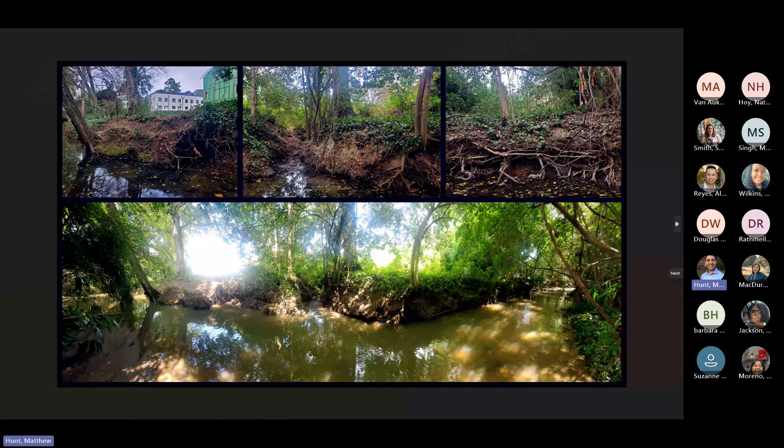If we continue to lose the land, we continue to lose the chance to recover that buffer. So this is a nice little review of where I started, back in 2024.

So, 2024, 2025, and then 2026, just this morning. All of these faint blue lines show there is no soil.

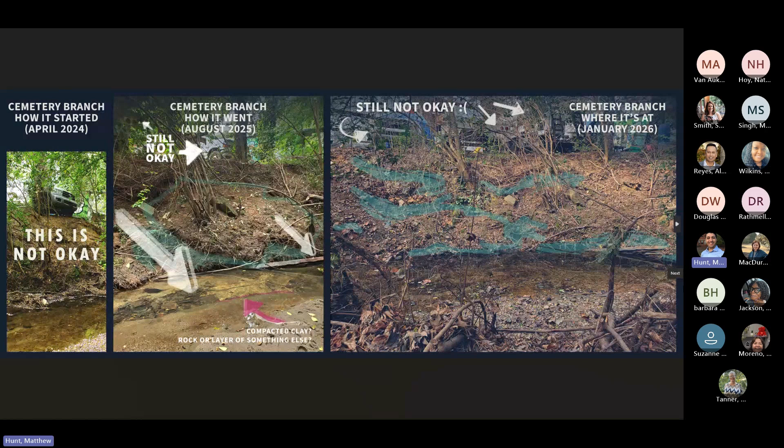It's just gap. Everything continues to erode in really confusing, dramatic ways, and it slumps that upslope neighbor's property into the creek. Next slide.

This is a confusing situation, so I'm going to hand out this paper set. This is the top-down view as though we were looking at it from a map, and this is what it would look like in 3D perspective.

It's easier to match it up and see, oh, that's impervious surface, that's supposed to be the sewer line and riparian buffer, but that buffer is actually deteriorating.

If development is taking the entire lot up to where the surveyor points are, then they're using whatever area this is assumed to be and factoring that into their impervious surface limits.

But what's happening, this whole green section is of varying quality. If we don't have eyes on that and don't maintain it, then this is realistically not as large as it suggests. And if surveyors put flags on posts that don't have land underneath them...

...or may not have land in coming years, then that actually changes the impervious surface to pervious surface ratio.

I'm concerned about whether we should be addressing impervious surface limits using unbuildable land within that ratio. I don't know what it's currently like, but I want to revisit and encourage consideration to look into making adjustments.

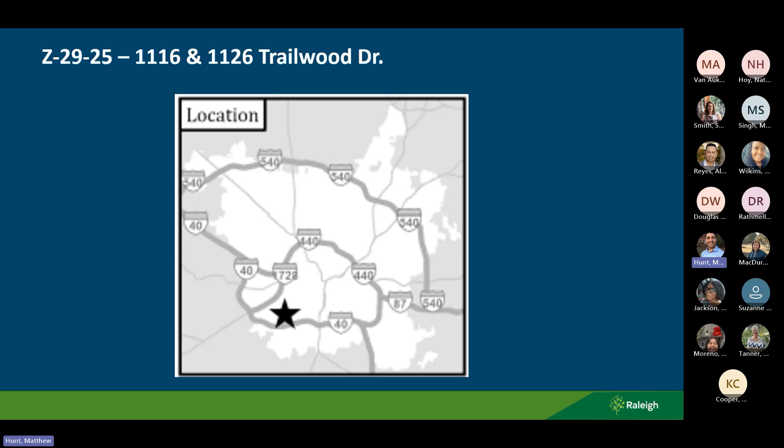So the first one is a new one on the planning commission's agenda that's coming up Tuesday the 13th. It's off Trailwood Drive, which is in Southwest Raleigh. Essentially, it's two lots that are acting as one residential lot, and they're looking to go from R4.

Sorry, R4 with the special residential parking overlay district on it. I think it's some neighborhood thing that they have. And it's going to an R10 conditional use with that same overlay district on it. Sorry, I added in my notes what that stands for because I've never seen that sort of overlay district before.

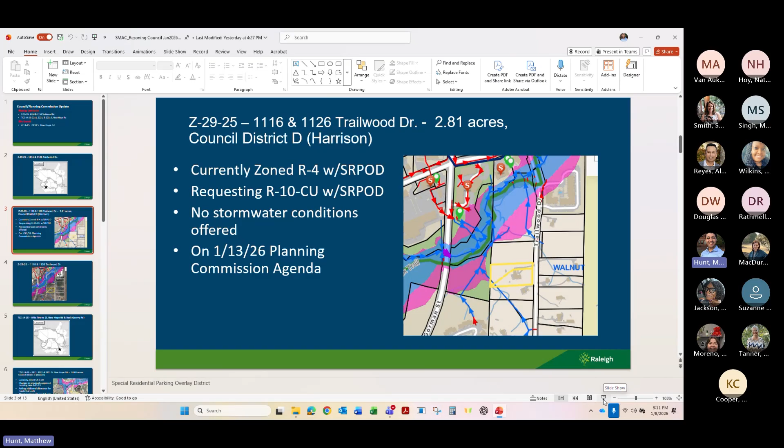But if long-time SMAC members will remember, the property to the north here had a rezoning a few years ago to do apartments in this area. They were going to stay out of the floodplain, but this is a very high part, this is real low and it went down very steeply. That is still not commenced, so they still haven't built that yet.

And it looks like the adjacent neighbor is having someone rezone their property as well now. I'm not sure the exact plans for it moving forward. I'm sure once it moves through the planning commission and city council, we'll know more about it. But right now there's no stormwater conditions.

So did the one to the north go to R10 as well? Yes, it went to something similar to R10. Yeah, something like that. And it should be noted that all these properties on Trailwood, which is kind of near NC State's campus, near Gorman Street and Neighbors area, these are all in the ETJ but not in the city limits.

So they're a little bit funky. A lot of the neighbors living out here feel like they live in the country, even though they can throw a rock to get to city problems. It's fairly rural looking development out here too, I'd say. But right now there's no stormwater conditions. The first time it'll be heard via planning commission is Tuesday, so after that we should have more information.

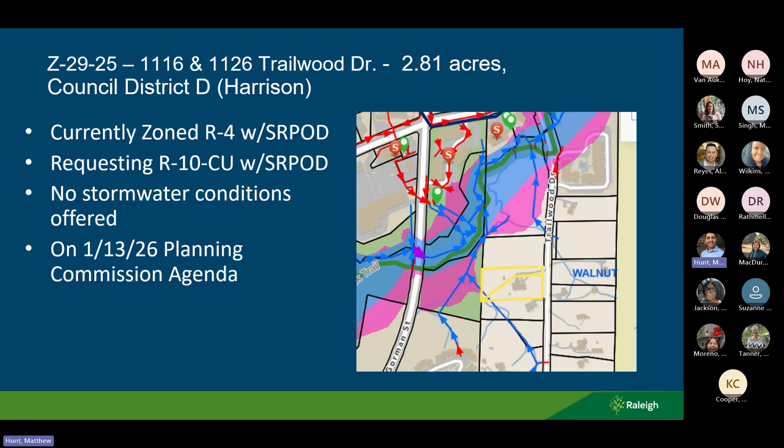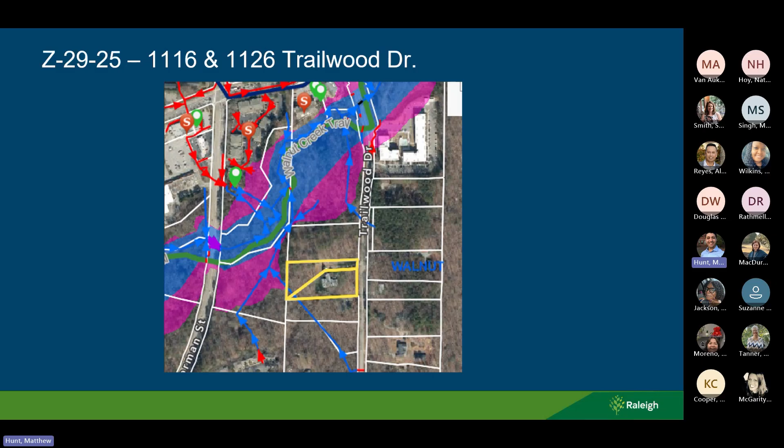All right, next one is back to the South New Hope area, in Olde Towne. This is a property to the east of South New Hope Road, which is not the one that we got the presentation from the applicant on, but this was kind of separate from that, just adjacent to it, so that's why I wanted to keep this on our radar as the other one is going through the process as well.

So this is mainly still going to be a commercial park, but they're adding some flexibility to allow for residential units out here, but this is still going to be the commercial hub for kind of Olde Towne. It's not really a floodplain, it's kind of on top of the hill. This is a watershed boundary line, so it's sitting on top of two different watersheds. But just kind of keeping this in our minds, since we know what's going on next door, there's no stormwater conditions on this one, which doesn't really surprise me.

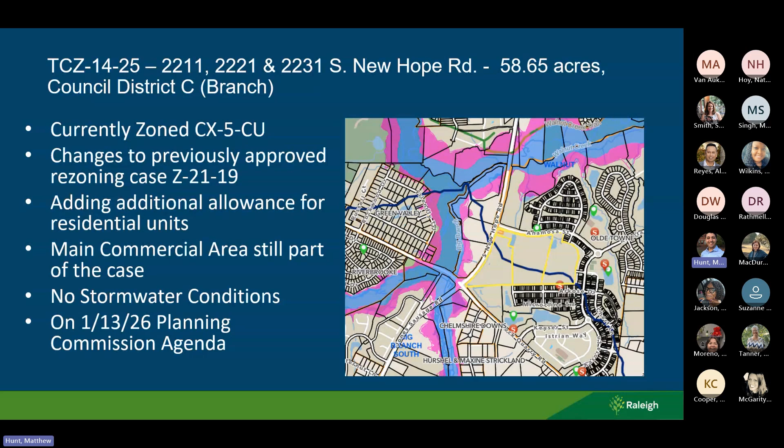And it's on the planning commission agenda for Tuesday as well. Was the case adjacent to it approved? Yeah, all right. Was that the next slide? Well, this is the aerial, this one is right. Yeah, so this is what they're saying now, just the way that it's kind of developed to go.

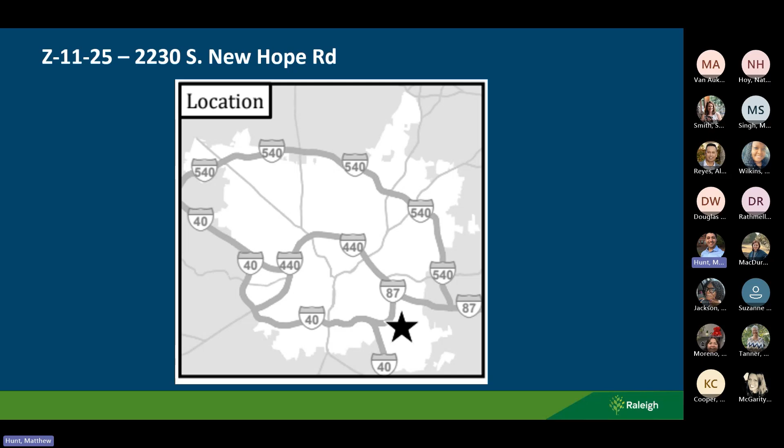And then our last real update is South New Hope Road, same area. And it's across the street, this little C-shaped lot, as Lanny called it on Tuesday night, which I really like. And this is the one where we had the presentation for. They've got conditions that was here as far as staying out of floodplain. They did add, going into the public hearing on last Tuesday night at council,

controlling the rate of runoff leaving their site to 50-year storm pre-development levels. So that was an additional condition that they added beyond just the floodplain conditions that we're talking about with this group. As you recall, the planning commission actually voted on this case before it came for you all. They actually voted in denial, but then it came to SMAC, and they've added conditions for floodplain, and then they met with PEJ, and they added conditions for stormwater rate control at this point.

They went to public hearing at the beginning of December, and also got continued to last Tuesday's public hearing, and they got continued until January 20th at the next city council meeting, because they're going to get some more conditions as it relates to affordable housing.

But they are still in discussion with PEJ. There was time added to this case for both sides, since City didn't get to talk this past Tuesday because they used up all their time from the previous public hearing continuation. So both sides got more time added, and both will be able to talk at the January 20th hearing.

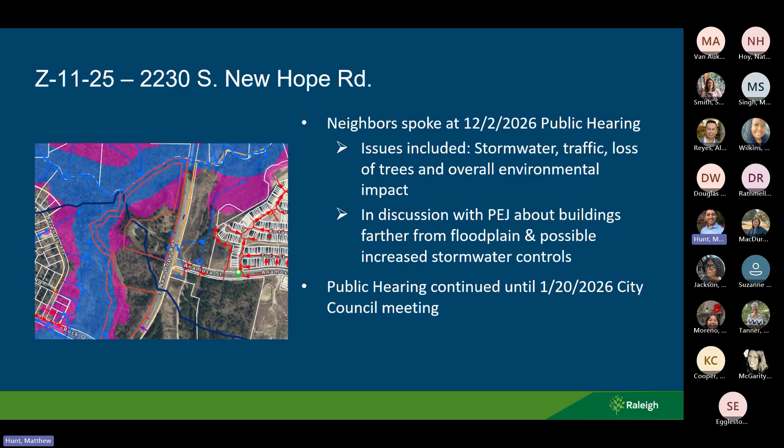And then they added the rate control condition between the December 2nd public hearing and the January 6th public hearing, and they've committed to enhanced stormwater or sediment erosion control, plus additional stormwater management—pre-post comparison. They brought it up to the 50-year storm for post-construction stormwater, and the 25-year storm for during-construction sediment, whereas the requirement by ordinance would be 10 and 10 for during-construction sediment erosion control.

When we say no building, is that like when people are developing homes at smaller scale but have a protected tree area they don't go anywhere near? Is that the same thing, or will they just not have a final building on that area but still be able to disturb it? Yeah, they haven't committed to that—they've committed to no parking lot or parking in that area, no buildings, but they're not committed to not regrading the area they're allowed to grade in without any sort of variance. I can't guarantee they're not going to disturb the trees in there.

I'm not sure the exact tree conservation rules for this area, because tree conservation rules are around major roadways and streams, so they'll have a stream in the back and a certain amount of tree conservation area there. They're not actually committed to keeping all the trees in the floodplain, but they're not going to develop on that northern part of the site—that'll be the TCA. And they're committed to no impervious surface in the floodplain—no parking area, no building, basically keeping people out. I believe they said they're cutting their site area by approximately half with these conditions.

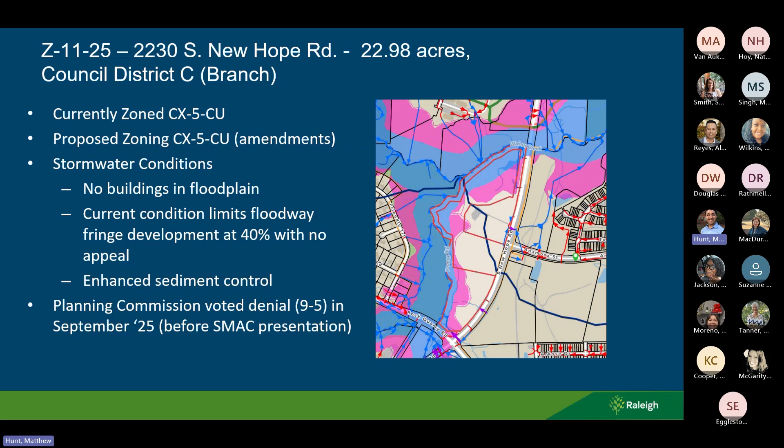Extra information first. I'm gonna try to set the expectations. I'm not looking for comment on this, but it's an interesting enough case that Mr. Croft and I have talked about it. It's something I feel like we should just at least hit on.

Essentially larger developments that are next to highways, which the Beltline classifies as a highway, have a certain vegetative buffer around them. As you can see, this is from 2020 and this is from 2025.

So obviously anyone that's been around West Raleigh in the past 5 years knows NCDOT's been working on the belt line in that area for quite some time, and they're pretty close to wrapping it up. This red line is the Kmart lot line essentially as it stands today, though we don't have records on the areas of the old property lines.

Essentially they're coming in to rezone this area because they're doing some limited commercial redevelopment here now in the existing footprint, and they're looking for rezoning to be able to build more dense development here.

But at odds is the SHOD yard not being there, because as you can see, it appears the Kmart property used to go out farther and the belt line wasn't near close to it. When the belt line expanded and they took out the vegetative buffer, they probably put it in Kmart property, because you can see their parking lot from there. So now there's no vegetative buffer there.

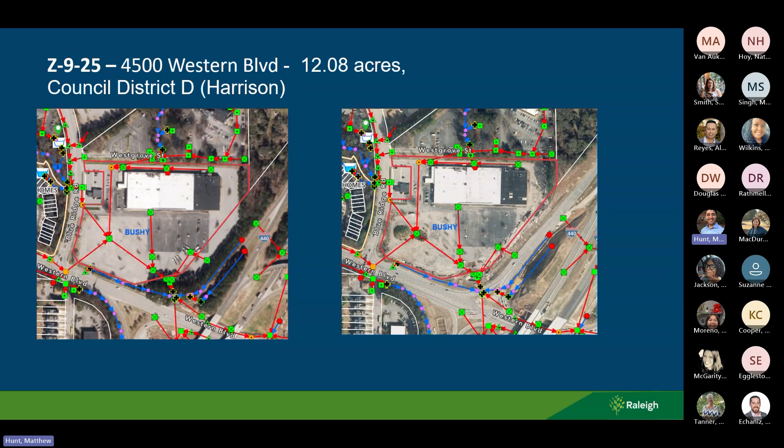I would request, in the Trailwood example, which is going to be a few of them going, I am going to meet with the team next week. I'd love to have some communications, but I can share that with you. I hate waiting until after the event to go back - I'd like to be able to go in and hear the concerns before we get to the public hearing. So I will reach out to you once I have that meeting, or maybe I'll meet with you. Okay, thank you. All right, so that was on our site.

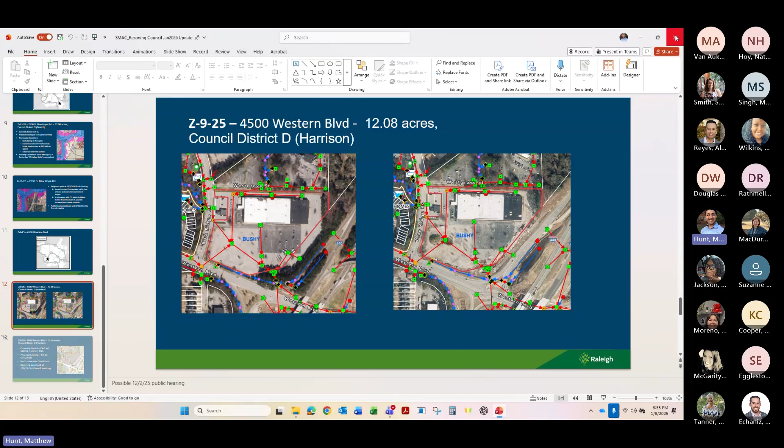Board plan is attached, as always, and referenced in the agenda items. We do have a stormwater staff update. I'd like to introduce Allison Acosta, who has joined the stormwater plan review team this week. She's coming to us from the city of Charleston, South Carolina, where she spent time as a civil engineer, reviewing plans for stormwater compliance, which is what we're asking her to do. She brings excellent experience, with additional years of experience in private consulting, drafting and designing civil plans with a concentration on stormwater management. She graduated from Clemson University in 2017, and she's a professional engineer. Please welcome Allison to our team.

High priority topics: we're still working on implementing the new e-scribe system. In the emails you received with the agenda package, there is now a publicly accessible link if you would like to access the agenda through e-scribe. We will, for the time being, still have the PDF attachment for your convenience, but over time please try the e-scribe. We'd like to ultimately convert and use the e-scribe agenda method.

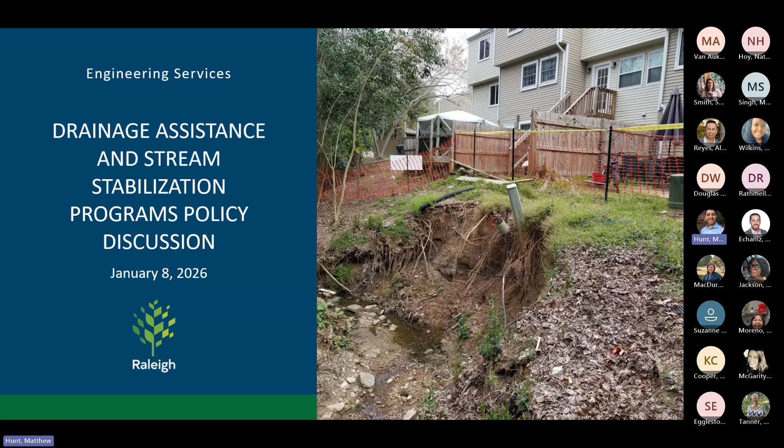So we're still here to receive some suggestions, but probably wait to vote at the next meeting. Is that correct? Yes, that is correct. I understand there's a lot of new language, we'll go through that so we can understand. Great, give you guys an opportunity. Great to see you guys again.

Our mission statement for stormwater is to protect life, support health, and natural resources for sustainable growth. Our vision statement is for our stormwater program. We have different groups we work with, highlighted here, including infrastructure and assistance down in yellow. We work with all our various groups and capacities together to be stormwater smart.

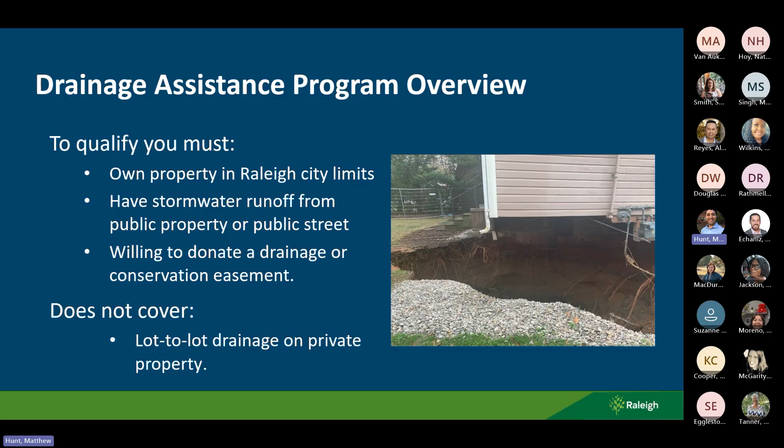So just a little program overview. This has been a couple of months as to what qualifies for drainage assistance and stream stabilization. You have to own property within city limits, have stormwater runoff from public property or public street that is some sort of public contribution, and be willing to donate a drainage easement or conservation easement. We do not cover lot-to-lot drainage or private drainage.

So just to give you a timeline, back in 1989 City Council created a city cost share program for stormwater, understanding that a lot of these repairs—and you've seen the cost of repairs can be quite high—so there was a cost share, as these are all on private property, for the private property owners to maintain.

It was eventually realized that even if you had, say, a $100,000 project—which, as you know, right now it's a smaller project—the homeowners could put in $20,000, which was 20%, the cost share at the time. That's still a lot of money for them, so it became a fully funded city program in 2016.

Then in 2022, five policies were brought before the commission and council, and we also created the stream stabilization program with the creation of the stream stabilization policy. Now, about four years later, we're coming back with policy revisions, just to show how this program has evolved and where it's come to.

So again, just a refresher as to why we're proposing these changes: to align with the unified development ordinance and new stormwater design manual, and to limit projects that have structures built in the Neuse River Buffer prior to the buffer rules going into effect.

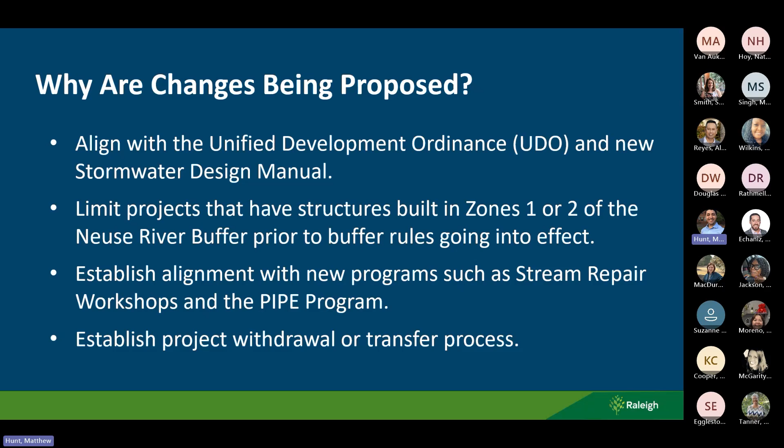We're establishing alignment with new programs such as stream repair workshops and the PIPE program—this slide is just a little refresher on what the PIPE program is. And then we're going to really hone in on the project withdrawal and transfer process, which was a lot of your feedback that we appreciated from the last commission meeting. So, PIPE—and I really like this acronym—stands for Pipe Inspection and Public Engagement Program.

We try to be more proactive. As you know, a lot of what we do within stormwater drainage systems is reactive, so working with our partners in asset management to help lead this program allows us to become more proactive. We appreciate that, along with working with the homeowners and communicating with them as well.

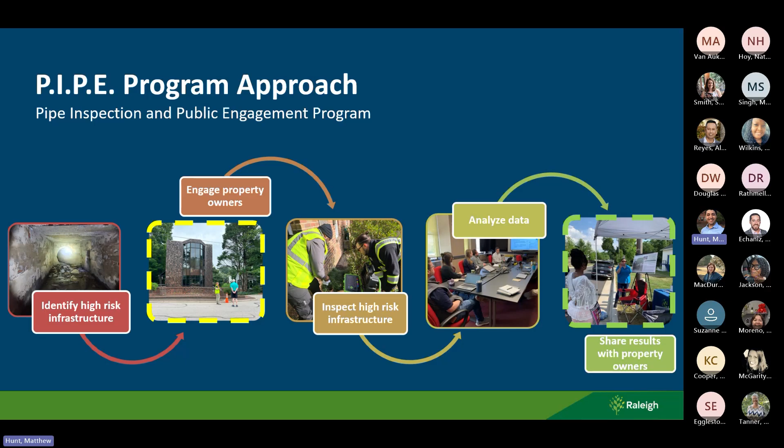So the feedback you gave, which we really appreciate, led to good discussion. You asked us to identify holdups for approved projects, to provide solutions for those project holdups—which you'll see reflected in some of the text we're proposing today—and you asked that funds approved but unspent on approved projects cannot be kept if the property withdraws.

The only concern is if we spend this money and the property withdraws—how can we try to deter property owners from withdrawing from the program? Because that is money the city could otherwise have.

Since 2016, when the program became fully funded by the city, SMAC has approved 75 projects. 4 of those projects have been withdrawn by the property owner. 1 more project was withdrawn due to an HOA being defunct. 1 more project is on hold because of easement concerns. And 2 more projects are on hold because the properties are listed for sale.

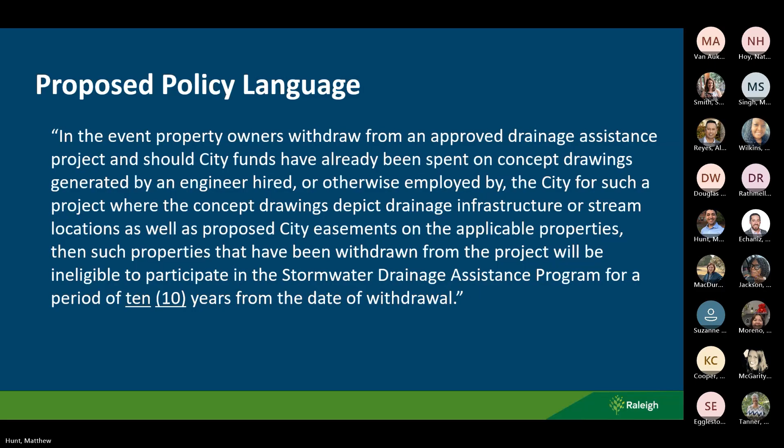So the second scenario would be, what if someone sells the house - that's one of the scenarios I mentioned. So they sell the house, and you have a new homeowner living there. In that case, we make sure to provide a copy of the work we have done, the concept drawings, sharing it with the new homeowner. We initially thought to give them 30 days, but it was suggested we give 60 days, which is more reasonable.

So the homeowner has enough time to become familiar with the issues and the plan we are proposing, so they're not rushed. It's up to the new homeowner - they can say, no, I don't want to participate, and that's completely fine, we are not going to penalize them for that. They can still come back, but they have to go through the same process again: submit the application form, which we will score and evaluate.

If there are other properties involved in the drainage project, the provision elsewhere about withdrawal applies. So despite all that, the new owners of the withdrawn property will have the possibility to apply, and they will not get a period of ineligibility, so they are eligible.

Great, thank you. Good, yeah, good feedback from the last meeting too. Thanks for that. Thank you. Speak to it.

Let's see, looks like we're moving right along. Let's go. Oh, is that happening? We're getting ready for you though, ready for your motion to adjourn. Yeah, we're holding that for you. All right, here we go.

Sally's going to educate us on requirements for development and redevelopment, post-construction world. Good afternoon. Ben will be joining me, but he's decided to wait until we get to his portion.

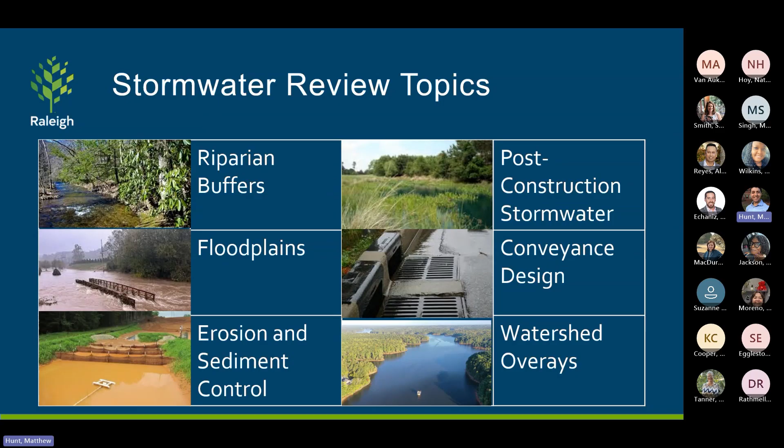All right, well, I'll be talking about an overview of our development regulations and then focusing on the full stormwater and exempt property requirements, as well as the ongoing requirements after construction. So there's 6 areas our plan review team works on today. We will be talking about post-construction stormwater, not the other 5 areas, but I will note you previously had a presentation about the watershed overlays. Those do include additional post-construction requirements, but we will not be talking about this today. So, post-construction stormwater.

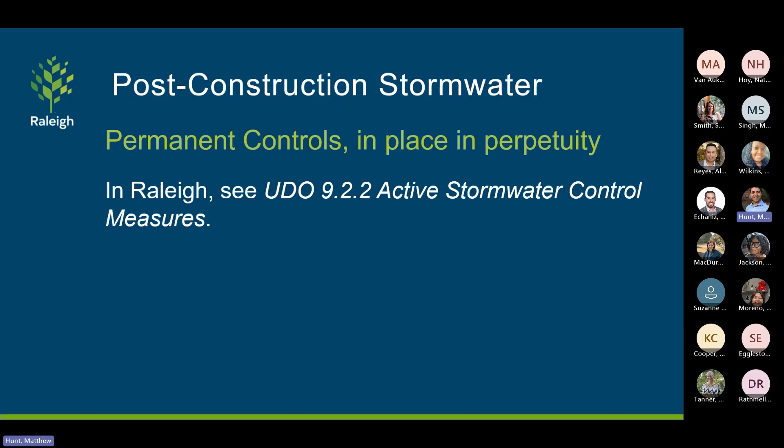So just so that I'm going to cover, because I know you all come from a variety of backgrounds, I'm going to talk some about the general concepts and mostly about what Raleigh does. So post-construction stormwater, you can think of that as the permanent controls, in contrast to the active or during-construction controls, or sediment control. So these are the controls that are in place in perpetuity. In Raleigh, the UDO calls these active stormwater control measures. That's the title of that section of the UDO.

In Raleigh, we split these into 2 categories. I'll talk about each of these separately, but we have exempt property requirements and the full stormwater requirements. The full stormwater requirements, I'm going to talk about those first. That's what most people think about when they think about post-construction stormwater.

In Raleigh, the split between these is for projects with 1 or 2 unit dwellings, so a single family house or a duplex is all that's in the project. If the property is less than 1 acre, it's under the exempt requirements. If it's over 1 acre, it has the full requirements. For everything besides those 1 and 2 unit dwellings—townhouses, apartment buildings, shopping centers, schools, churches, government buildings, everything else—there's a half acre threshold between the exempt property requirements and the full stormwater requirements.

So these full stormwater requirements, basically a licensed designer—an engineer, landscape architect, et cetera—is required. Typically, this results in building a stormwater control measure, or an SCM.

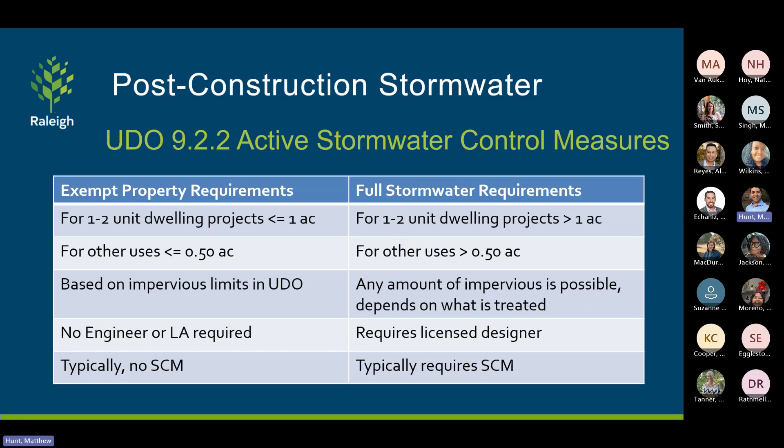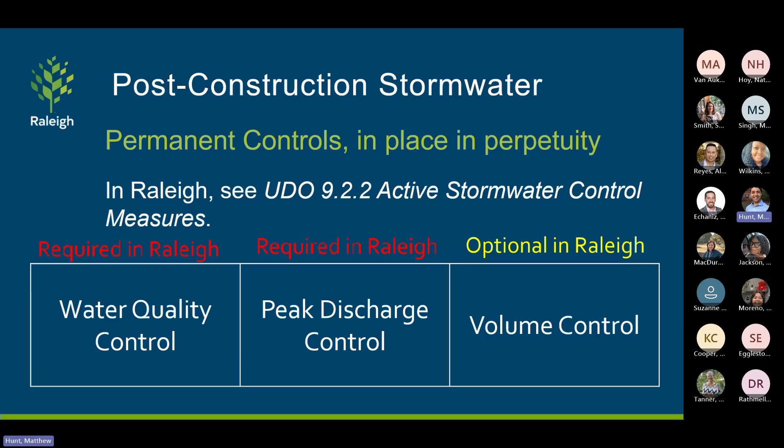So water quality, the goal is to mitigate the impact of development on water quality. We know that development introduces pollutants to the environment, but these controls are trying to mitigate that impact.

The drivers are environmental impacts, drinking water source protection, human health, and those things are usually embodied in state and federal laws. The metrics can be nutrients—the most common metric is total suspended solids, bacteria—and then it's tied to a specific amount of rainfall design storm.

In Raleigh, this is under code 9.2.2.B, called nitrogen reduction. Our drivers are the eutrophication that can occur in the Neuse River, which impacts aquatic life, and that is in state law as the Neuse Nutrient Strategy. That is where our specific water quality regulations come from.

And so we use nitrogen, or total nitrogen, as the metric to see have people complied with our regulations. We also have a driver from our stormwater permit related to the Clean Water Act—basically that says if we didn't have this, we'd have to have something else instead.

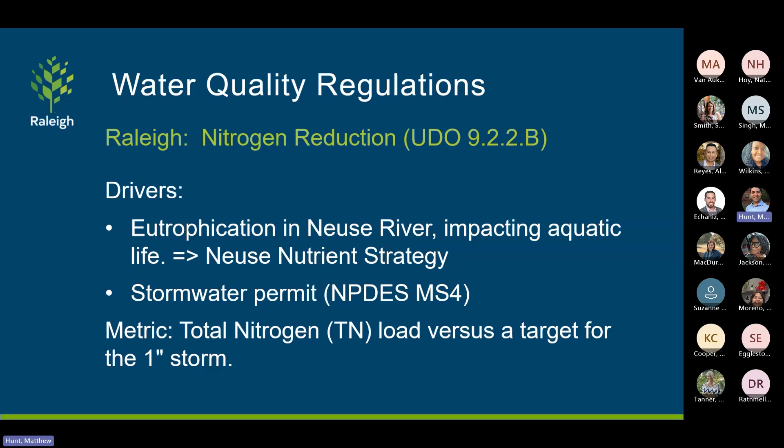So in North Carolina, in Raleigh, we use total nitrogen, and we use the 1 inch storm—so 1 inch of rainfall.

In terms of what we do with existing impervious area, existing development—if it was built prior to May 1st of 2001, that's the date we first had rules related to the Neuse River. So if it was built in 1984, it's exempt, and we exclude it from the calculations. We just subtract it out.

If it was built after 2001, we look at what is existing at the time the applicant comes in. So this happens all the time.

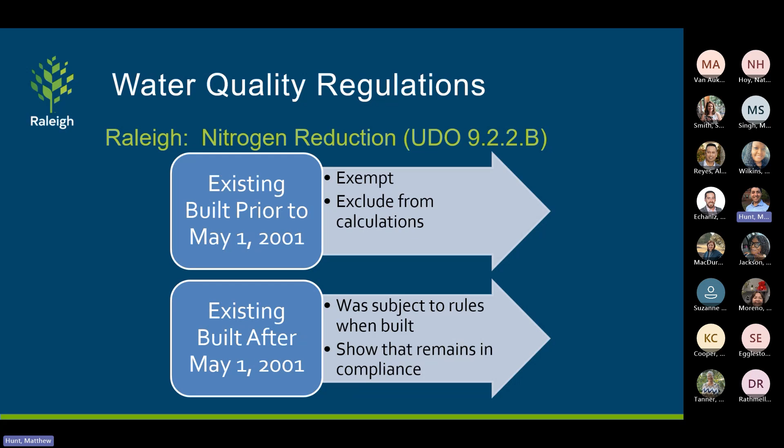There's a church and they want to build an addition, or whatever it is. Those projects were subject to the rules at the time they were built. So we just need them to show that they're remaining in compliance, but they're not doing anything with their new project that would take them out of compliance. So they're not stopping their stormwater control measure, and if it's a site that relied on forests to help meet their nitrogen target, they're not cutting down that whole forest without doing anything else to compensate. So we're checking that.

Under these nitrogen rules, there's a 24% impervious area threshold. If it's less than or equal to that, a project can buy offsite nutrient credits. Those are going to benefit the Neuse River, but they won't necessarily benefit Raleigh streams because they may be elsewhere in the watershed.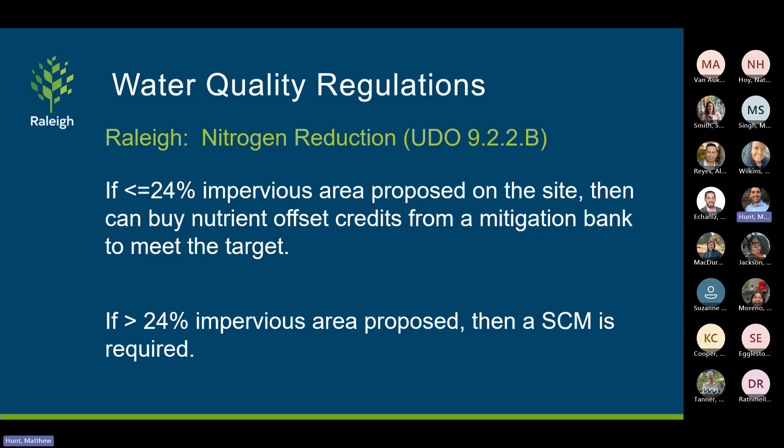If greater than 24% impervious area is proposed, a stormwater control measure is required. I'll say this is a change—the rules got updated in 2023. We are almost always seeing over 24% just as Raleigh has more development, becoming denser development.

So I just wanted to hit on these types of stormwater control measures that people use to address water quality. These are the ones called out as primary SCMs in the state's manual.

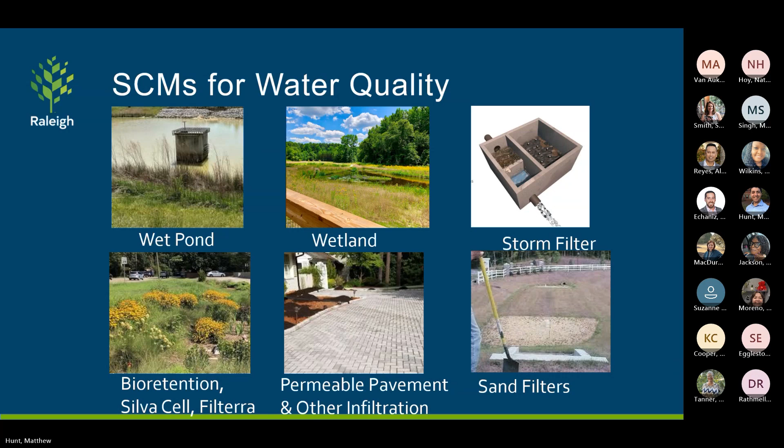Next I'm going to talk about peak discharge regulations. The goal with a peak discharge regulation is to eliminate the need to upgrade the downstream pipe system. If you think about it, if you had an area that was pasture and it gets developed, there's more runoff, you would need to upsize the downstream pipes. Instead, we make each site control to the rate that came off before, so that we don't have to redo the pipe system downstream every time there's a new development.

Sanitary sewer handles this differently—people may do sewer studies with big developments. So there are other ways to do it, but this is traditionally how stormwater has been doing this for 50 years.

It also prevents increased flooding. Our regulations don't make an existing flooding issue better, but the idea is that they won't make it worse.

Typically the metric is the peak discharge—the rate of water leaving the site at specified design storms, a specific amount of rainfall over a specific amount of time. This is also known as quantity control or detention requirements.

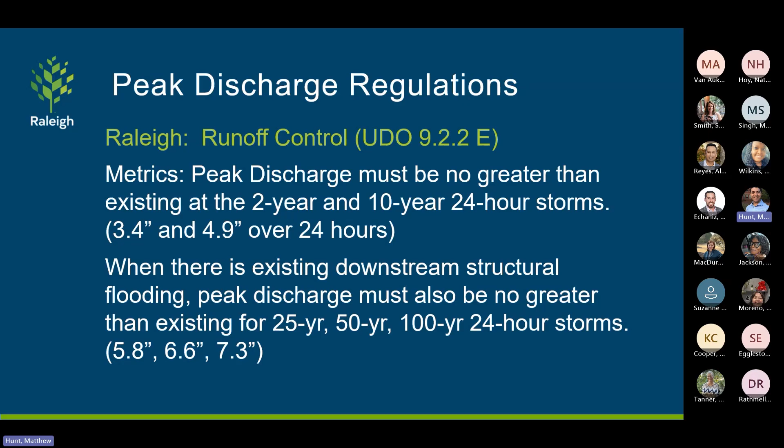When there is existing downstream structural flooding, which we have a system internally to document so staff can pull up that information, then there also has to be detention for the 25, 50, and 100-year storms. So there's a greater requirement. Again, it's not going to eliminate that flooding problem, but the idea is that it will not make it worse.

We do have some exemptions in our code. One is that if at all points it's less than a 10% increase—this doesn't come up very often, but it theoretically could. Let's say somebody had an urban farm and they were adding a shed; that might not increase things more than 10%.

There's also a possibility if doing detention results in an adverse impact or no benefit. This can happen, say a site is next to the FEMA floodplain, next to Crabtree Creek—there's a huge upstream drainage area, and the small site might have no impact on the peak discharge. The impact might round to zero. They could show no benefit, that sort of thing.

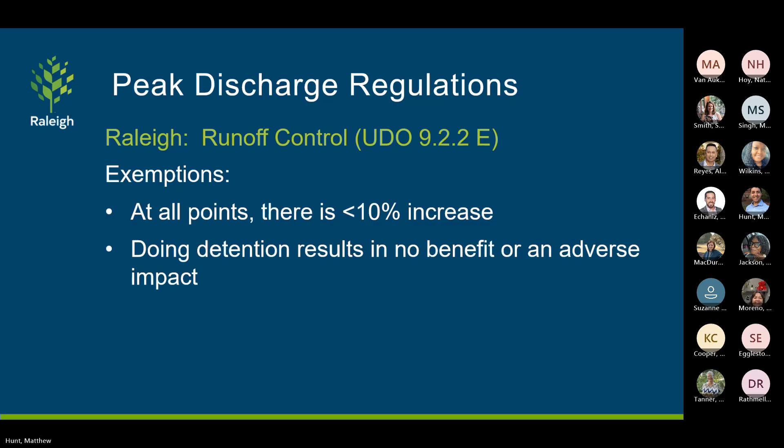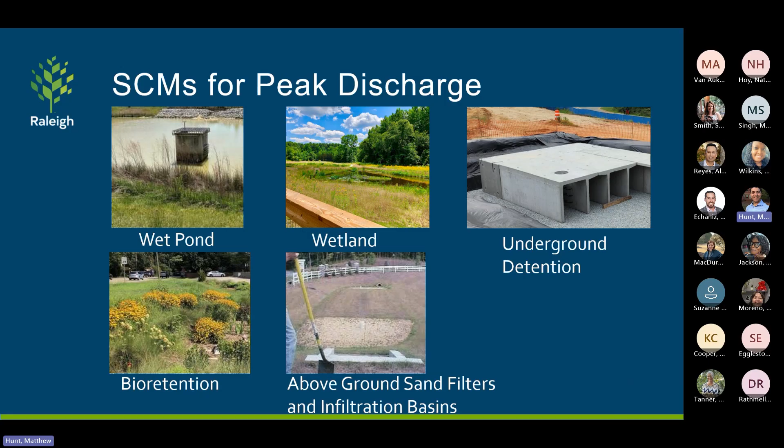And then I'm going to briefly talk about volume control, which, as I said, is not required in Raleigh, but is optional. The goal of volume control is to mitigate the increase in volume. Remember my graphics showing that the pipe's still the same amount full, but it might run for a lot longer. This tries to get at that by taking away that volume increase.

That could be tied to water quality or peak discharge, but it also impacts stream erosion protection and recharging groundwater. There are some places in the country that have stormwater requirements around those items. The metric is the volume of water for a specific amount of rain. Sometimes there's a recharge requirement, sometimes it's a low impact development design criteria.

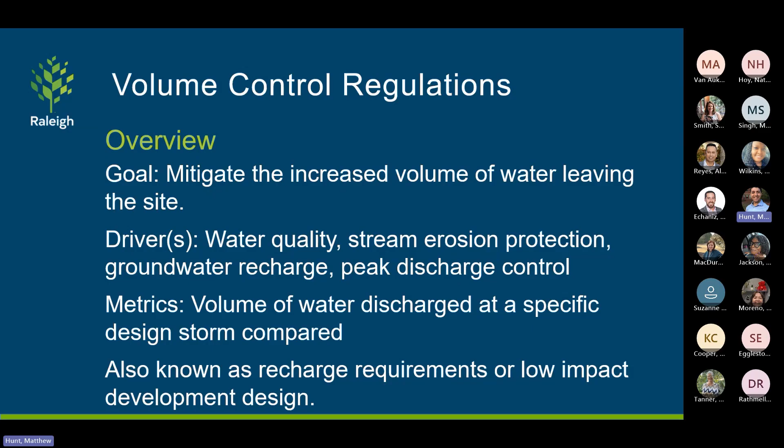So we have options in two parts of our code where this is an alternative compliance. We don't see very many people choosing it, and that's because a lot of Raleigh soils are clay, so it's hard to get infiltration. We follow the state's policy, which in some ways treats 1 inch as 1.3 inches in Raleigh, and compares it to undeveloped conditions, like forest or pasture, instead of existing conditions.

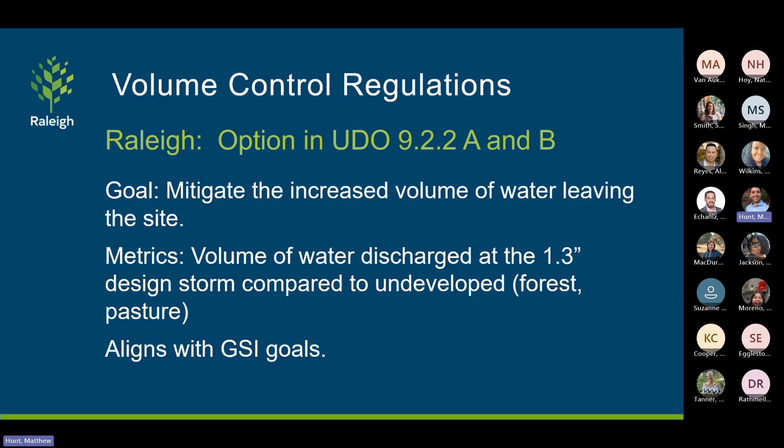This does align with our green stormwater infrastructure goals. It's a great way to go when we can do it. But again, it's not required in Raleigh.

All right, next I'm going to talk about the exempt property requirement. As a reminder, that's the smaller sites, but under the 1 acre or half acre thresholds.

Can I ask a quick question? Yeah, this is so helpful, by the way. Regarding the different options people choose to use, do you have a sense—I have a hunch as to what the answer is—but what percentage of folks tend to go for detention and wet pond storage versus some of those GSI approaches presented there?

I think it's a variety of things. There's definitely some inertia—if you've always designed wet ponds, you just keep designing wet ponds. I think the biggest driver is whether the stormwater control measure does both. The things we see most often are wet ponds and bioretention wetlands, which can do both water quality and peak discharge in the same measure. That's a reason we see less of some other measures, where it's hard to do both.

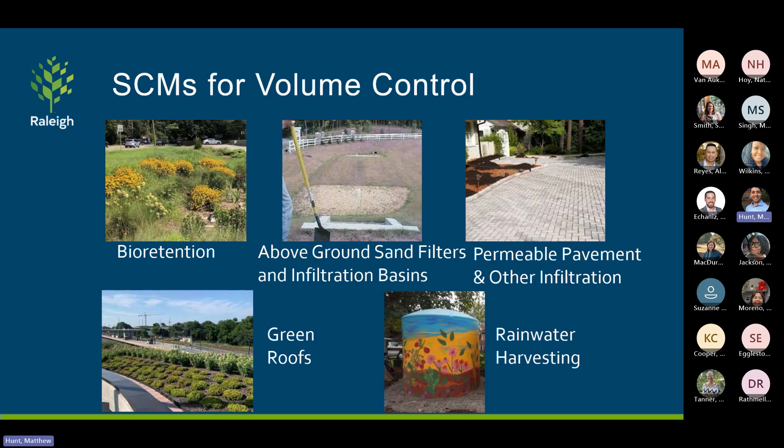So this is in section 9.2.2.A, titled exemptions, which is why we call it the exempt property requirements—they're exempt from the full stormwater requirements, but that doesn't mean they have no requirements.

The core of this is a table that says, based on your zoning, this is the maximum impervious surface you can put on your lot. This only applies to those small sites, and basically only to things originally developed prior to 2001. If it was developed in 2010, it had impervious limits typically assigned during development because it was subject to the full requirements. So it really tends to be the older infill projects that are subject to these limits.

I'd say these limits really came out of residents' concerns about infill development and lot-to-lot drainage. I think we can all imagine living someplace where a house is torn down, and now there's a much bigger house five feet from the lot lines with downspouts pointing onto your lot—that causes people concern. So that was one strategy here.

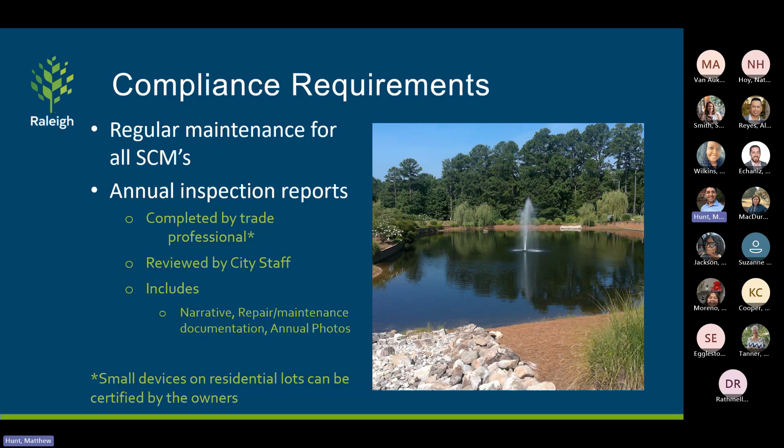So that's what we're keeping track of. But maintenance, like I always tell people, is year round.

After that annual inspection, you know what the annual maintenance is coming up, because a lot of times the inspector will recommend what to do for that year on that device to the owner. So it's a really good conduit for the owner to get a good sense of what's needed. The inspectors we work with are all pretty good now.

Like 15 years ago we were all kind of finding our way, but we have really good people out there doing these inspections now, and they're really proactive with their owners about letting them know what needs to happen moving forward. A lot of times that means working with yourself or a landscape company or maintenance company to make sure these repairs happen.

Document the maintenance year round and any major repairs throughout the year. So maintenance is a full-time responsibility and a lifetime responsibility. That's why I kind of came in and mentioned that these devices are great, but they have to be maintained properly. If they're not maintained, they're not going to function.

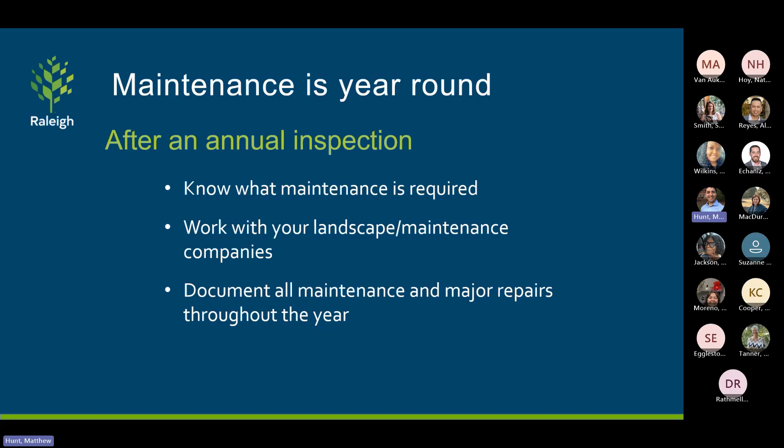So that's essentially all we have as far as the post-construction area. Any questions about it?

You guys, just bigger picture wise, do you at all track the increase in impervious surface within the city limits?

All the regs are great and we're doing the best we can to control what is probably a net increase in stormwater despite the controls. So I'm just curious if we ever capture that to see how much we're stopping, or how bad the issue's getting, or try to forecast it.

We do. It's not for this purpose, but as you're aware, our revenues are based on impervious surface within the city limits.

So we have very good records, property by property, of impervious surface, and that's what our fees are based on. So we do have a good understanding of how impervious surface is changing.

And we are currently in the process of doing a non-point source pollutant loading model that will, in addition to understanding that impervious surface, know where SCMs and other controls are that remove those pollutants. So over the next 12 to 18 months we'll have a very good understanding of pollutant flows throughout the city, and we're going to use that for a couple of purposes.

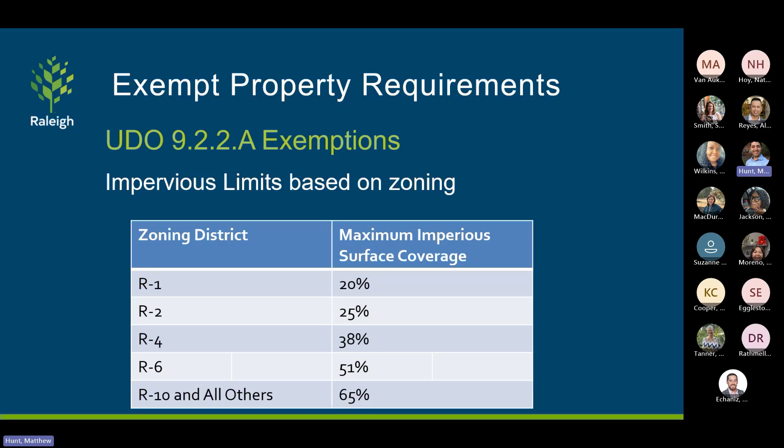Just for clarity, bringing you into how we on council talk about these cases and how these issues come up - we'll use North Hills as an example since it's coming up. They have a small area plan which specifies community benefits, one being stormwater management. In the case, they have a stormwater commitment but don't go into specifics, and that's where I, speaking for myself on council, wonder: are all options created equal? I don't know if it would be better for North Hills to do one approach or another. If I'm in conversation with Kane, I don't know those things, so I'm not sure how to advocate properly.

If Wayne's okay with it, we could send you a past SMAC presentation where we talked about examples of good rezoning conditions. One thing we discussed is that rather than saying you should have permeable pavement or green roofs, it's better to focus on the benefit - is the benefit to treat a 1 inch storm? There are many ways to do that. If they commit to treating a 1 inch storm for the whole property, that's good, but in redevelopment that might not be feasible. So maybe they commit to something like 30% of their water quality treatment with complete green stormwater infrastructure, and the other 70% underground. That at least gets 30% with multiple benefits - plants for pollinators, infiltration, and evapotranspiration.

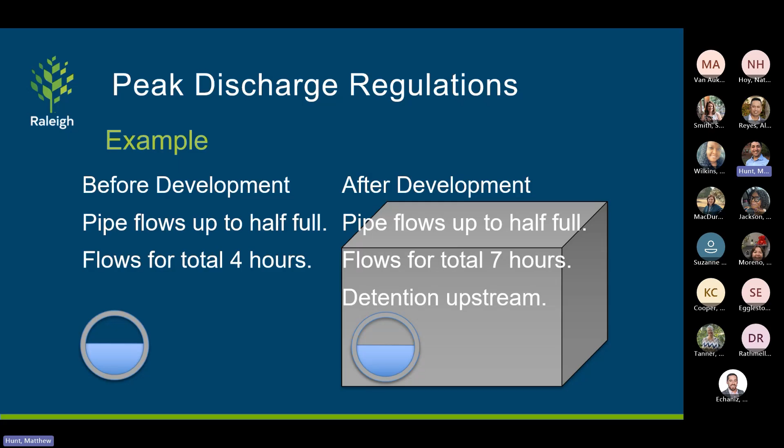I'll say, like Raleigh Water for sewers, they require big developments to do studies, and then some projects have to upgrade sewers. That is traditionally not how stormwater is done. Because the amount of stormwater is increasing incrementally, each project takes care of its own rather than having to go to the roads and rip up the pipes, because otherwise we'd potentially have to upsize something for miles and miles.

Right, and there would potentially be a flooding impact downstream. So this is the better option for sure.

A lot of other municipalities have what's called the 10% rule, which is basically you go downstream to a point where your project only accounts for 10% of the watershed, and you do a peak analysis for that site. But the problem is that's not your property, you can't control it. You can't go fix things downstream. That's the policy the city has, and it's actually a pretty good policy for that. You have to control what you can control.

So the struggle council has is always how do we communicate this out? There's no doubt, from a novice side of me, that what we're doing is great - I'm not at all judging that. It's always how do I get this to a digestible explanation for people who come and demand things they don't know about. They say I want this, I want a study, I want this, and it all sounds good to me. But I don't know how to best communicate that it's not the best way to do it, because ABC. So your assistance and guidance on how to have that conversation with the community would be really impactful for council.

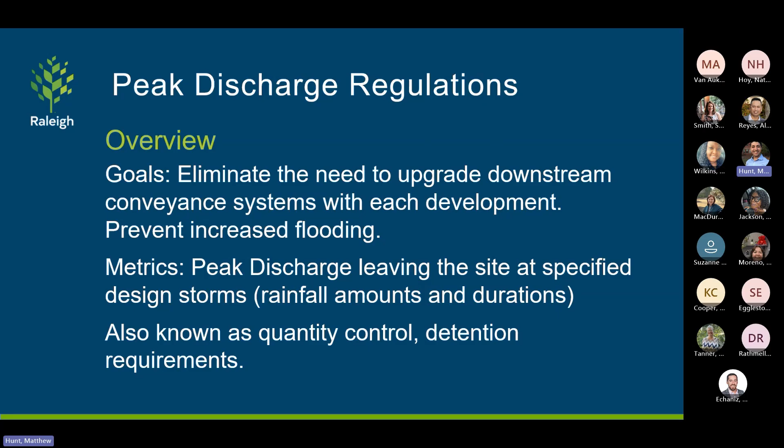I have to go to meetings all the time because my 5 Points area is struggling so bad, and they're going to look at this and disregard everything that's said, because they're like, you don't understand, you're not living what I'm living, and it's horrible. So I'm trying to take this to the next level for me as a councilor, to be able to show them, no, we are doing the work - even though I see you don't feel this, and I respect that, I understand you don't feel that - but I need to help you know that our stormwater team knows all of this, and we're trying to paint a bigger picture of the city.

So again, it doesn't need to be solved tomorrow. Can I put Wayne and Nicola together, and I think we could strategize? That'd be great, that'd be great.

Thank you. But it is delicate - I mean, I live near one of those, so you know, talk to somebody. To my point, it is increasing, so that is also true. We are doing the best we can, and more than a lot of other places do to help everyone. Is the city increasing education? I know some other municipalities have done some studies.

I would suggest to councilors, if 5 Points is such an issue... I grew up in 5 Points and grew up on the street there, which still has no storm control measures. So there's plenty of them there. So maybe 5 Points is where the first meeting is, to start addressing it.

For the 5 Points and the older part of town, the biggest thing we've done in the past 20 years is this. We can detain to the 100-year storm in 5 Points, but where you put that water, that's what the issue is gonna be in 5 Points. Where that water is.

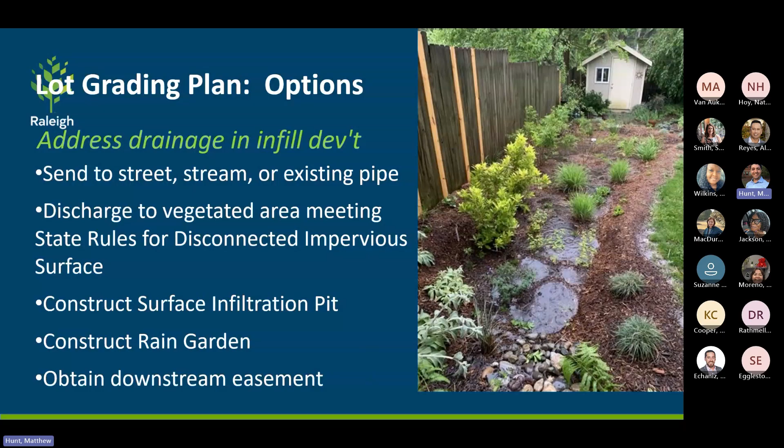And the nutrients, last thing - the nutrients are traditionally for the benefit of the estuary, which, as everyone will say, is a long ways away from here. And the volume focus would let us focus more on the issue that we have in the city, which is the flooding.

I would give an example from Maryland. Maryland has a recharge component - it's actually very small and it's based on your soil type. So if you're in sandy soil, like in the coastal plain, you have to do a lot of infiltration. If you're in the Piedmont, I think it's like 0.2 inches that gets infiltrated, which is a much more reasonable amount to do.

And I know that DEQ has looked at that sort of system for the Falls and Jordan Lakes. It's still under discussion. Are you guys tracking that policy, Jordan?